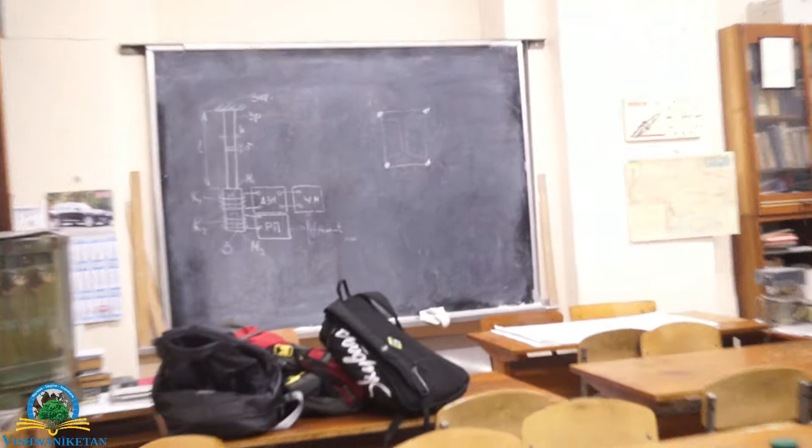So welcome to the biomechanics laboratory. This is our laboratory and also the place where students take their lectures and practices on material science and of course the biomechanics. Here you can see on the walls some of the publications and some of the information about mechanical properties of biological origins and some publications related to biomechanics that were done during last 10-15 years.

And of course this is a scientific laboratory, and here we have different testing machines and some very interesting measuring equipment here. And okay, this is the table of our professor who is in charge of this laboratory. And this year we have students from Vishwaniketan, from India, that are joining us and doing some projects on biomechanics.

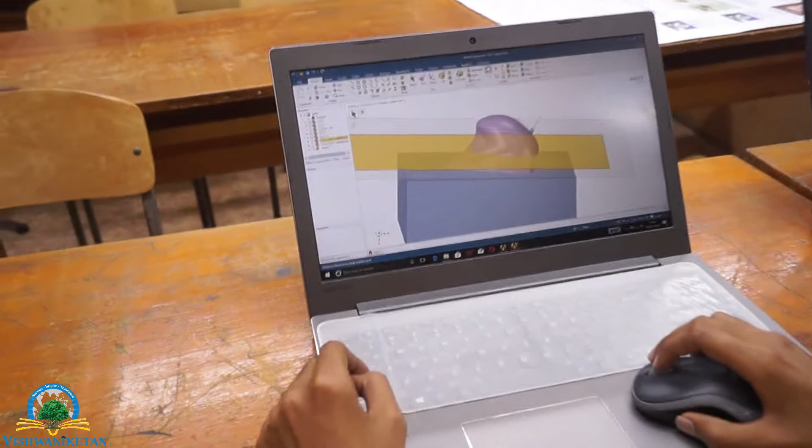Alright, and each year we have actually different objects to study. This year we have studied the talus bone and metacarpal bone. So, I think the students Ashwin and Akshay should tell us about what they have learned and what they are doing now. Okay.

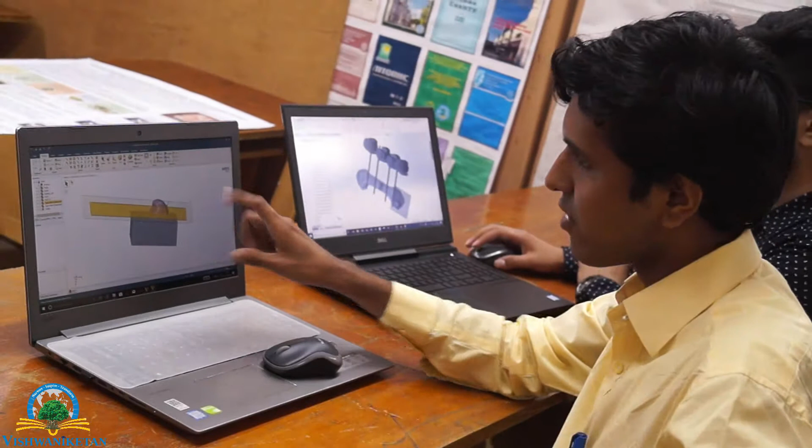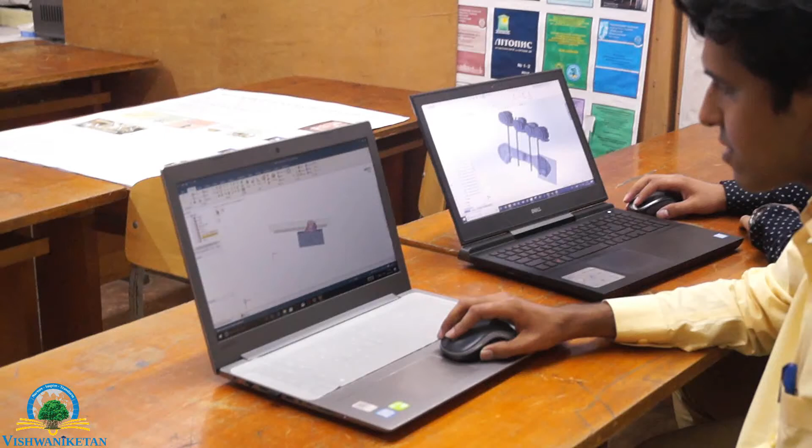From here we are now going to analyze the entire fracture. Now when you see this layer, this is the fracture where we are going to study, and we are going to get few conclusions after this. And this is the entire thing in the project. Okay, and what fixation system do you use?

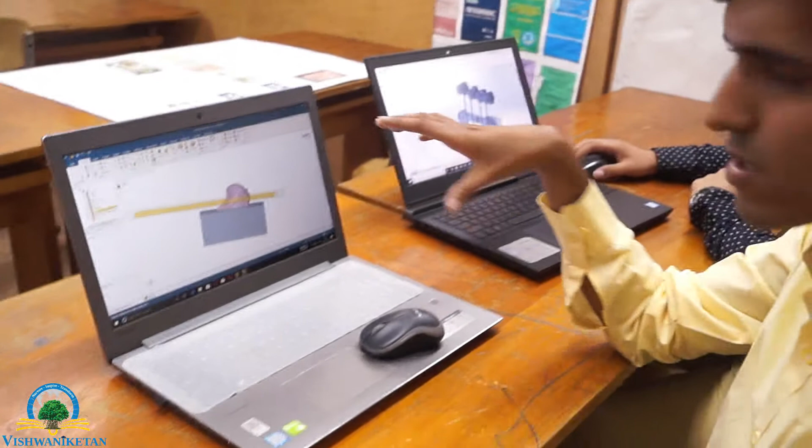Right now we have total 8 specimens which are under investigation. Out of those 8 specimens we have 2 screws, and 1 screw and 1 Kirschner wire. These are the combinations in fixation systems, and they are being placed in different directions and positions.

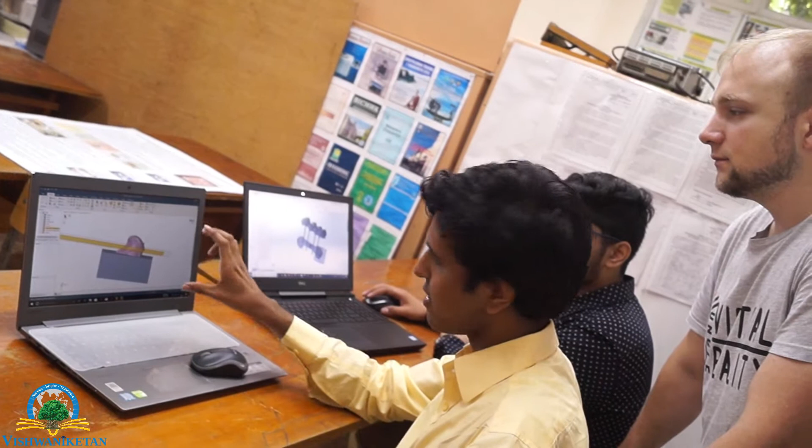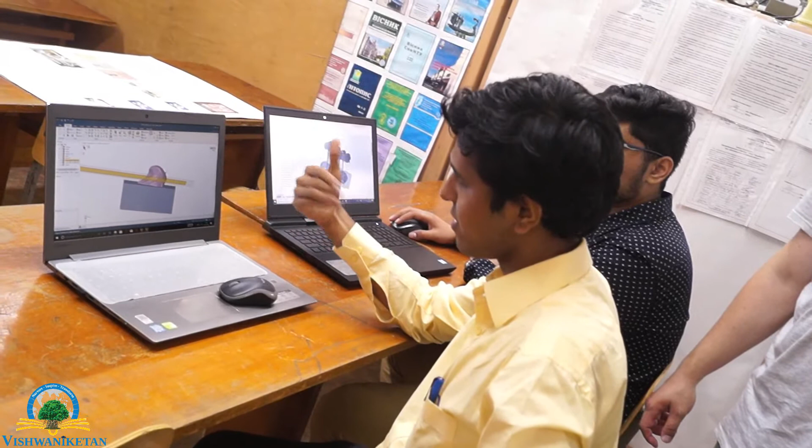Now this will be compared, and accordingly we will get those analysis, and then at the end we will conclude which fixation is better and superior, and this is actually more helpful for doctors, especially surgeons, to conclude which fixation is better.

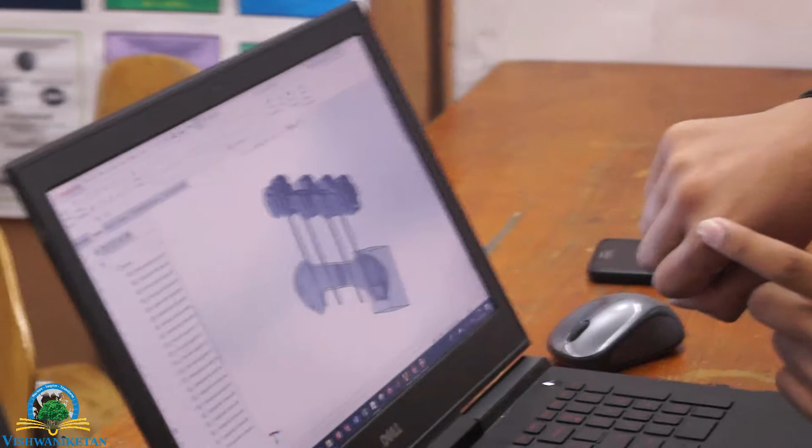Alright, and now let's move on to the second project for metacarpal bone, and Ashwin should present his work. Good afternoon all. My name is Ashwin Daware and I am working with Professor Victor here. My role in biomechanics is on metacarpal bone. Metacarpal bone is located here in hand. So we are actually investigating the hand bone of the index finger.

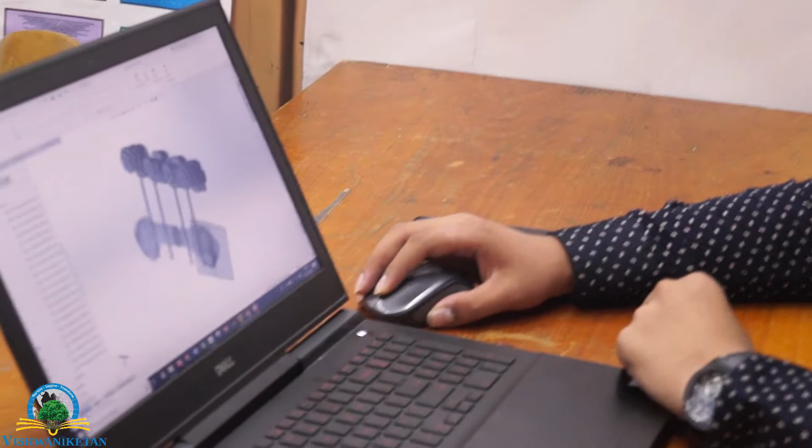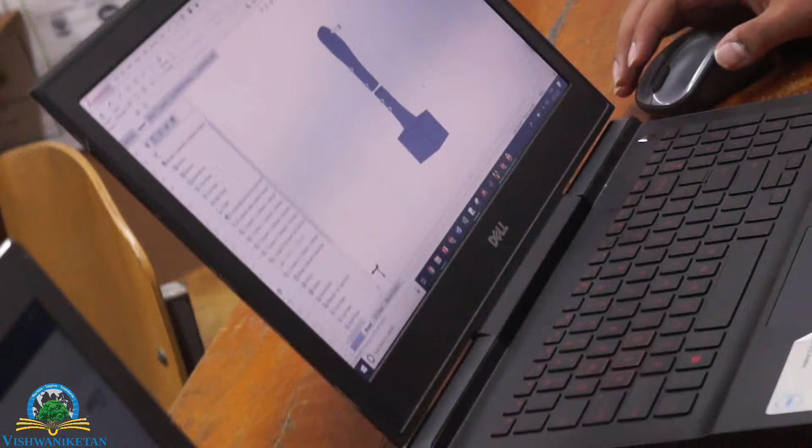So here you can see this is the first model that we have made. There are 3 different models that have been made in SolidWorks. What are the differences? Yes, there are actually 2 types of fractures that mainly occur. One is the middle fracture and one is at the head. So for middle fracture we have external fixation system.

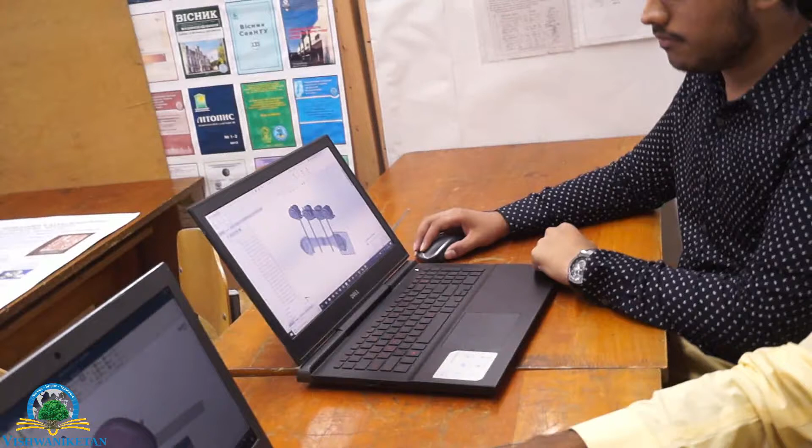There are two types of external fixation system. One is with plate and one is without plate. So this is the first system. This is middle fracture and this is the second system. And one more is there which is the fracture at the head, which is internal fixation system with plate.

So actually doctors don't know how to analyze the actual stresses that are produced. So in order to know how much load, which fixation system to be used, mechanical engineers are helping them to find out the exact actual forces that are applied, so that they can select the

appropriate fixation system. So here the computer tomography image was imported in SolidWorks, the 3D model of metacarpal bone was created, and then we made three different fixation systems. Right now we are also done with analysis of two different models, and one model is remaining. The simulation analysis was done in ANSYS 18.1. Here you can see the analysis.

These are the stress on spongy bone. This is the total deformation here. The different stresses on cortical bone, you can see.

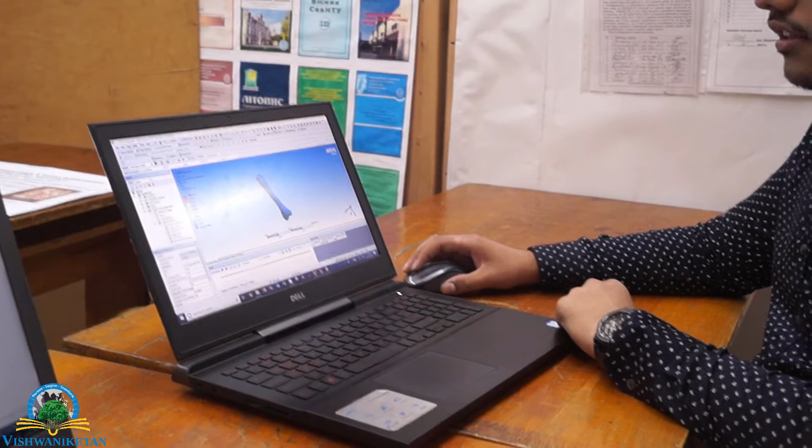So we have some stress concentrators here. We need to analyze this and say whether the loading conditions are appropriate for this kind of study, and also directional deformation.

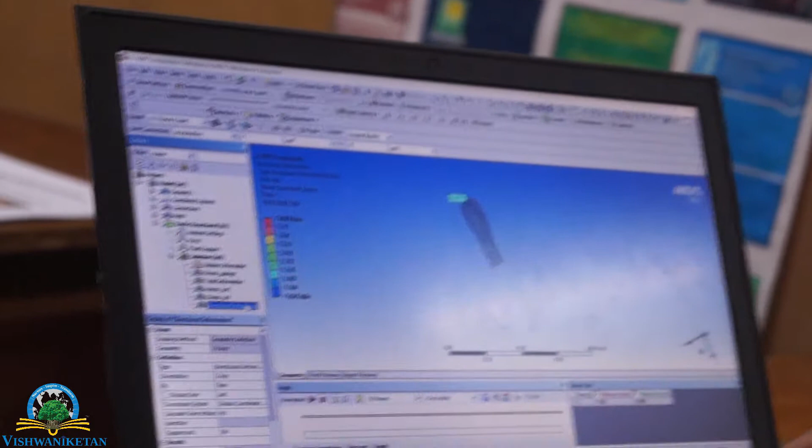We are going to compare our study with the students who are doing experimental studies. We will compare the different deformations in different directions as they have done in experiments, so those directions will be taken in simulation, to have results as close as possible.

So finally, once we are done with all simulations, we are remaining with only one. Once we finish this, we will compare both the experimental results. We already have experimental results with other two guys, and we will compare these results with ours, find the percentage errors, and thus say which fixation system is the best overall. Now we come to the experimental section.

This is our universal testing machine and some biomechanic objects, here at Kyiv Polytechnic Institute, Igor Sikorsky. Two students from India, Zaid and Mudit, come to explain about our objects.

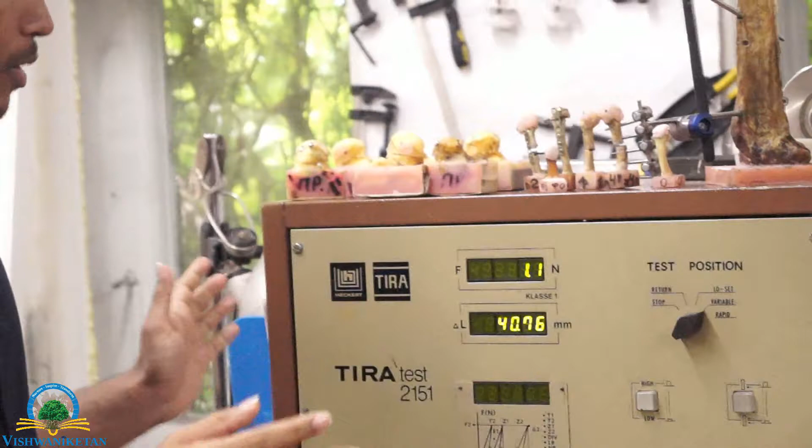Hello, my name is Mudit Golecha. I have worked on the talus bone, doing the experimental part. We used different screwing fixation systems to fix the fracture of the talus bone, and found the force and load from the machine by doing experiments. We've done 8 experiments for 8 talus specimens, and found the best specimen for the screwing fixation system.

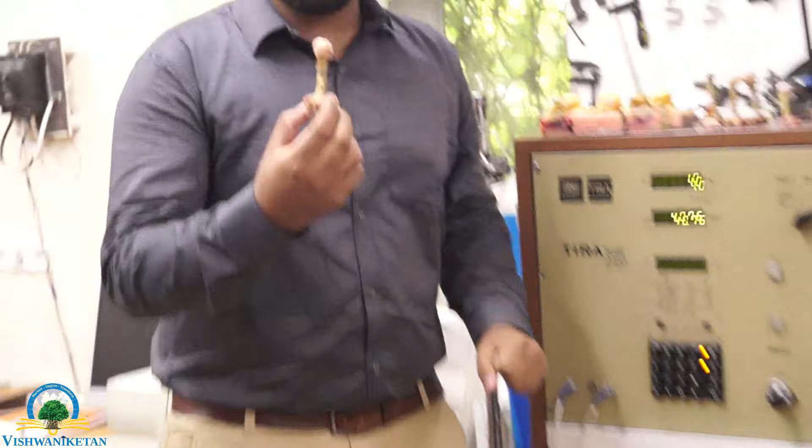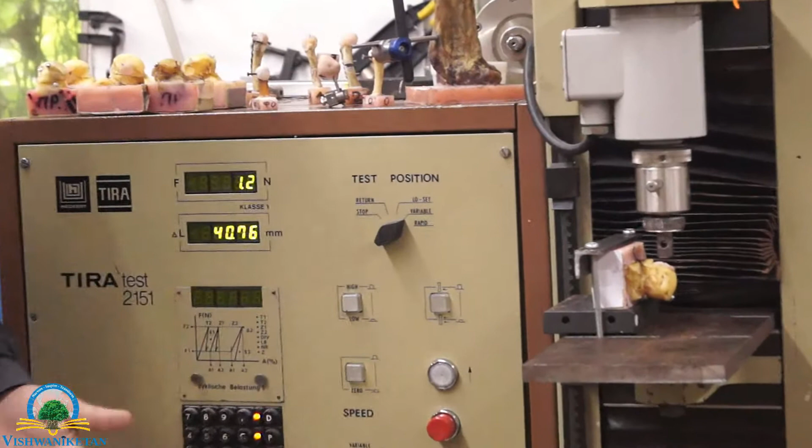These are the different types of fractures we have been working on with the test machines. We are applying different types of load to see where the bone deforms. We got different readings and deflections from this machine, converted them into graphs, and determined which system works best for different fracture types and loading, such as bending, rotation, and compression.

So this was from the experimental analysis laboratory.

This is our second year of this UG fellowship program. Currently we're almost finished with our projects, and the boys are doing very good. We hope to have good results, and if things go well, we will also be able to publish some papers at the end of this program. I hope in the future this program will have more impact on society, and maybe these biomechanical projects will help students from India with their master's programs, PhDs, and their lives.